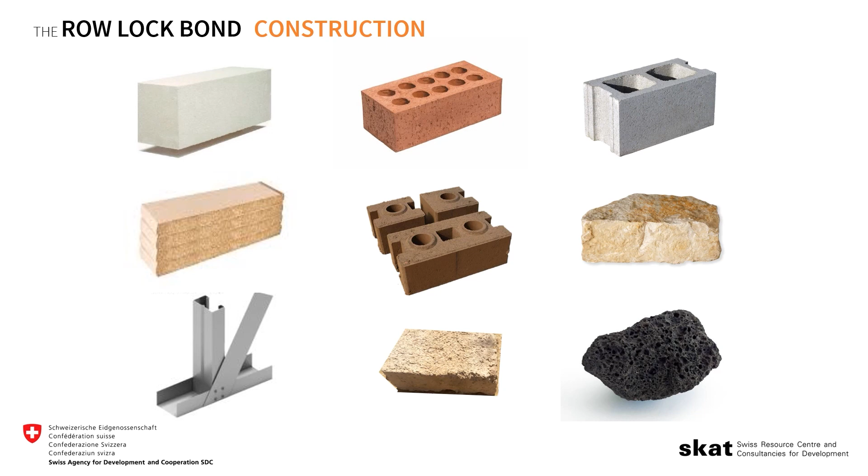All of you building and designing projects know you have to start controlling your quantities if you actually want to address and deliver the affordable housing being asked of all of us here. This really is the backbone of what Skat and the project are trying to do: figure out how to develop design solutions that can exist within this context and still deliver at the price point that we need.

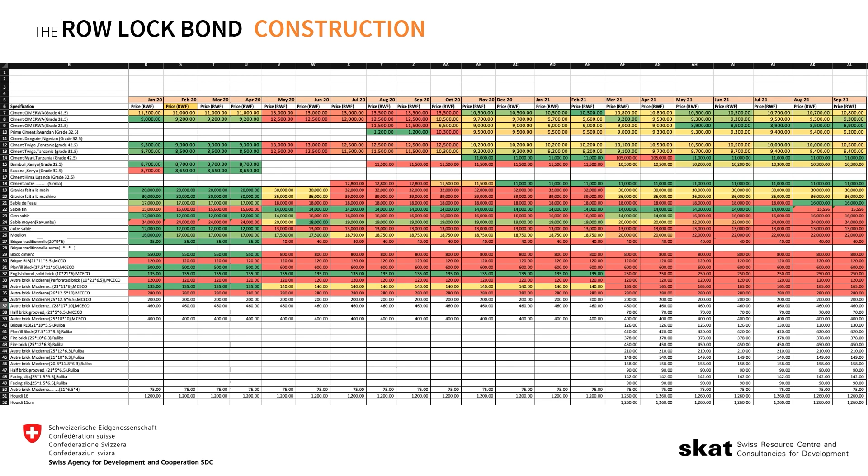Skat started to look at different walling materials. Today we're going to talk about the rowlock bond, the RCC reinforced rowlock bond wall. It's a function of looking at all the walls, all the building material inputs, and seeing that this one relies on less cement and plaster. We saw the price of cement go up quite a bit during this last period, and it continues to rise.

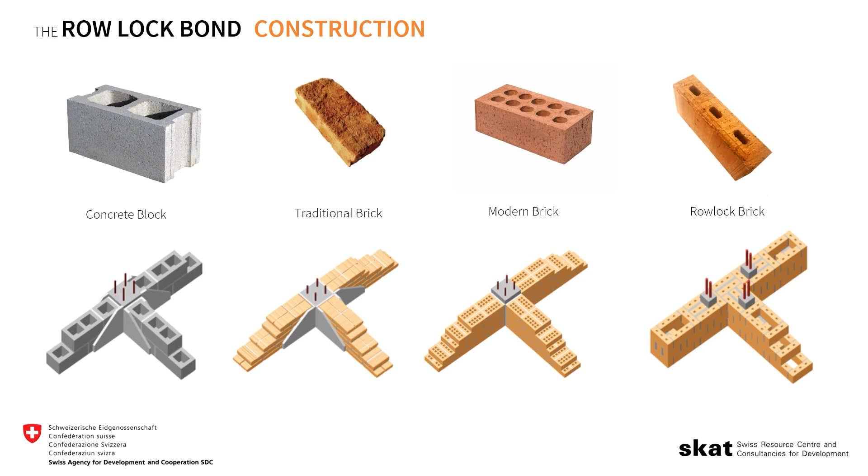Traditional bricks also require quite a bit of cement mortar and concrete for columns, etc. So looking at this type of study and trying to understand how to make the best use of technologies that might optimize our building material usage here, Skat came up with the idea of using this.

This is the rowlock bond, and if anybody knows it and sees it, you'll see there's a unique cross pattern. So as you're driving around town, the minute you see this cross, you know you've seen a rowlock bond. That also means you're seeing a cavity wall, and that cavity wall has a lot of potential thermally, but also structurally. That's what we're going to talk about today.

The rowlock bond is nothing that the Swiss or Skat invented. It has been around for a long time, specifically even before the Industrial Revolution. This house here is from 1801.

We can see our cross there, and we know that this is a cavity wall system. Again, 1856 in Canada, we're seeing this rowlock bond pattern. The reason why it was first invented was for workers' housing in the Industrial Revolution, being able to have a wall that is cheaper and minimizes the use of building materials.

And so it's particularly appropriate to us now, where we're having issues of high cost of materials, and yet we're expected to deliver affordable housing between 10 and 35 million.

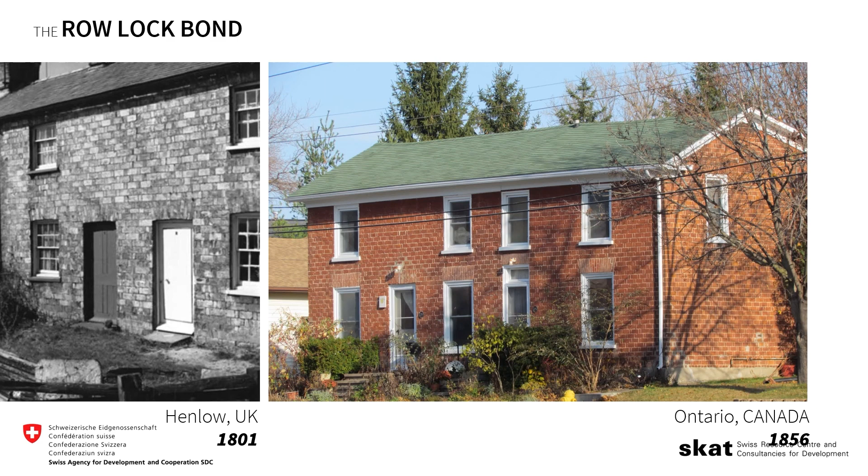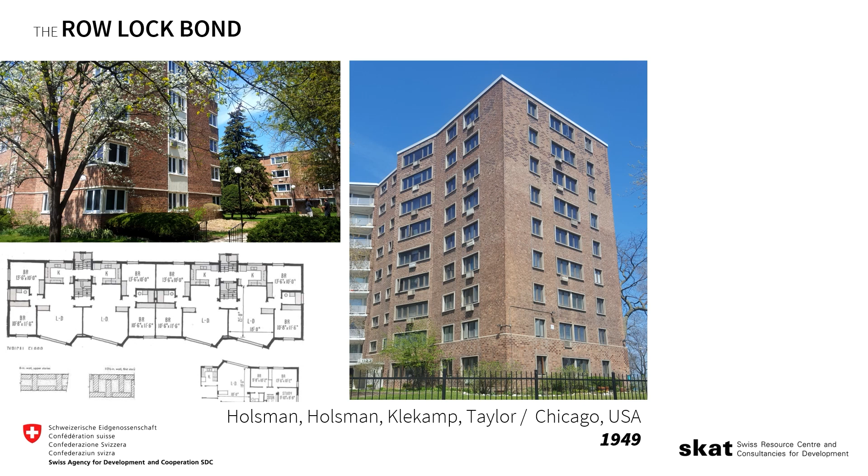So the rowlock bond, actually, even the Americans got in on the action in the 1940s. This is a rowlock bond that's 9 stories tall, which means it is a technology that can be adapted to different situations, where you can adapt the structural system to do different kinds of buildings. This was also a low-cost housing building.

Another one was built in Nepal, similar thing, and this one was actually built by Skat in Nepal, really trying to optimize the floor plan, optimize the interior circulation, to do something extremely basic that can deliver at the right cost and make good use of materials.

Now this is particularly interesting in Nepal because if anybody knows Nepal, they know that there are some earthquakes there, and this is also a high seismic region. So all of a sudden there's a parallel to think about why this is interesting for that context, and why it can be interesting for ours. Again, what can you do structurally to this wall that you can't do to others, that could help you respond to these issues of future shaking?

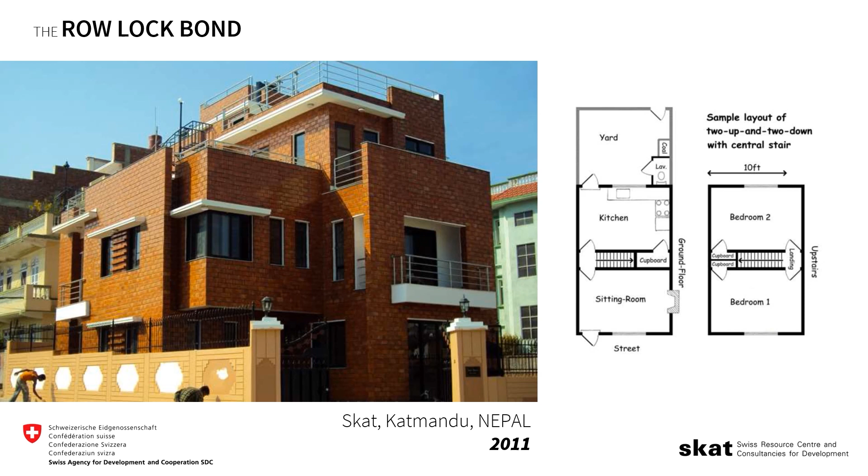You can do fancy stuff with rowlock bond, you can do curvy stuff with rowlock bond, and Skat did boxy stuff with rowlock bond. And the boxy stuff has a reason: that's how you can make sure that this is structurally sound.

The first time I ever discussed this building in public, someone stood up and said, 'You are being incredibly irresponsible, Fatu, showing us a building with no columns, how dare you?' And I realized I forgot the slide that showed all the internal structure. So today we're going to talk about all the internal structure, so that I don't get that comment again, and you know that Skat is doing good and responsible work by putting up buildings that are structurally sound.

Just to do a quick recap, here are our different walling systems. This is the one we're interested in, because it really minimizes our material inputs. This is significant, especially if our bag of cement has gone from 9,000 to 13,500 recently—thinking like this becomes quite important.

So even if you don't like the designs of Skat, that's fine. It's not about the design, it's about the structural system being proposed, and then all of you architects should be able to take the structural system and make it beautiful, and all of the other things that Skat as a project does not need to do.

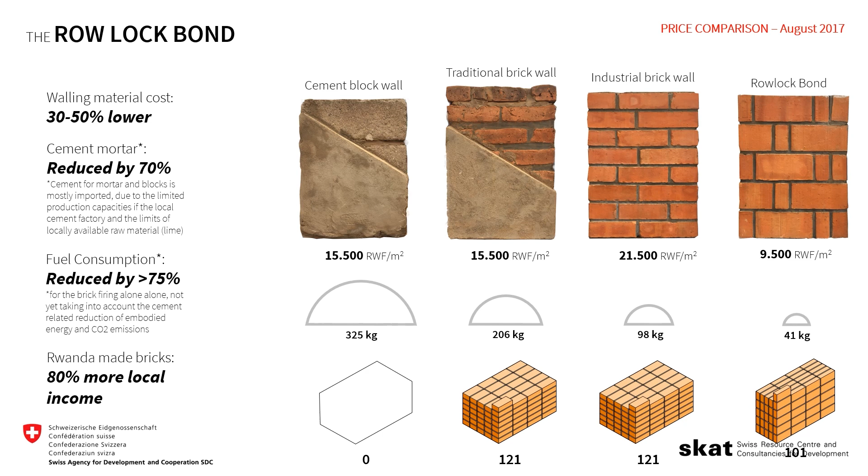Again, just reminding you, here are the prices of materials and the way that they're jumping. Here is cement also jumping during these sensitive times, so we need different solutions.

Within these rowlock bond buildings, secretly—and this is one that you'll visit if you go on the tour tomorrow—there's all this business inside. All of this is making sure that this building stands straight, that it resists seismic forces, and that it can also be a system that allows a maximum number of people to live in there comfortably and at a good price. What's actually inside? Let's take a peek.

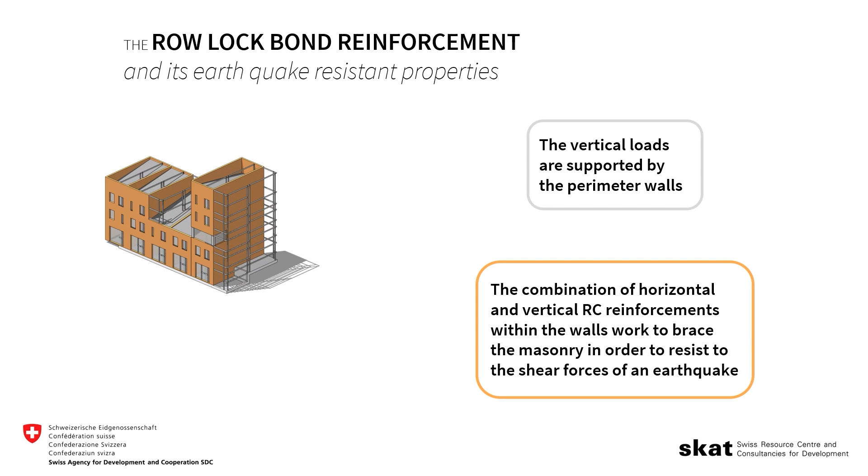So you've got your cavity wall here, and you essentially have 3 basic details. You can do rowlock bond. If you master these details, this system is for you and easily deployable. So we're going to have some vertical reinforcement, and that vertical reinforcement is exploiting the cavity and using the bricks as formwork to actually pour a mini column, shall we say—but it's not so much a mini column as a stiffener, we shall call it.

And when it's placed around a corner, it replaces your traditional column. A column would be like if I'm standing on one foot, but this, which is tied around the corner, is almost like a truss around the corner, and it's actually more resistant.

And that's how my seismic or my shear forces and my lateral forces, specifically at the base of the building, are getting the most push and pull. That's actually how that's resisting.

Then if I have a particularly long wall, I'll put a couple more of these vertical reinforcements. And if I have a T, I can then put these three and tie them together. Again, all the reinforcement details for this are available to you through Skat and the project, so please feel free to go ask if you want to see any of this.

So this vertical reinforcement is going from the building, tied into the ring beam, and goes straight up.

Then the second type of reinforcement is horizontal reinforcement, about every 1.20 meters, almost a corset, right? Which holds and cinches the building together.

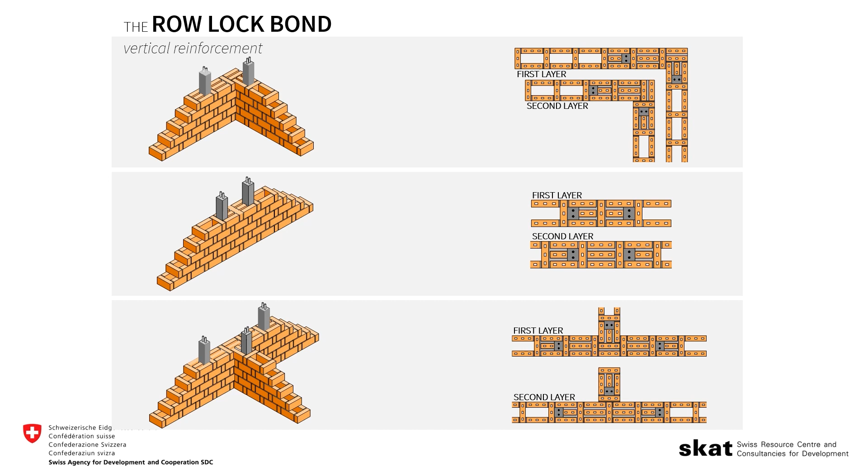Again, between the two systems, you're going to have your vertical, which I just showed you here, and then your horizontal reinforcement, which goes and ties the building together and also allows you to tie together these corner details. So all of a sudden you start to have this grid inside of the wall that is basically using the wall as formwork, but the wall is actually load bearing.

So we're moving away from a typical column beam structure, where all of your loads are point loads that are transferred to your beams and coming down to the ground to footings. No, in this situation, the wall is the load bearing wall, which is why the quality of the brick matters so much. That's why people like Samuel, who presented, a mechanical engineer specialized in brick making, is so important, because we need a brick here that has at least 10 megapascals to be able to resist those loads.

So the wall is load bearing, bringing the loads from top to bottom, and then inside, to resist all the shear forces, are these sly little reinforcements that fit into the wall. So again, you end up with this cage.

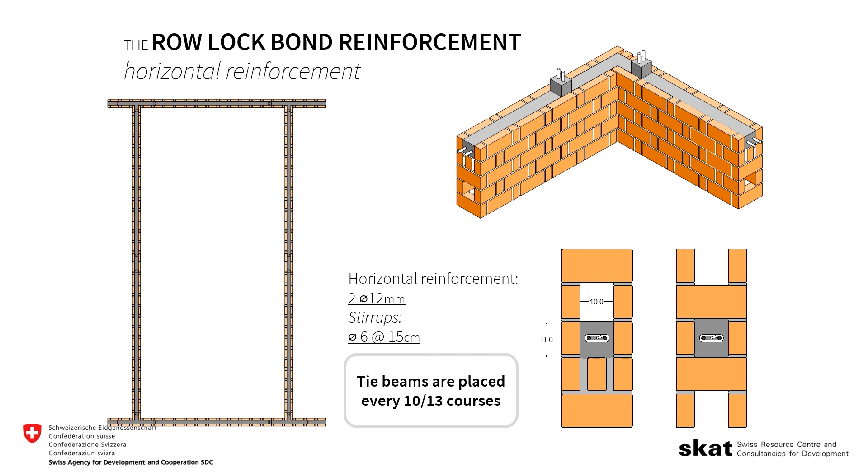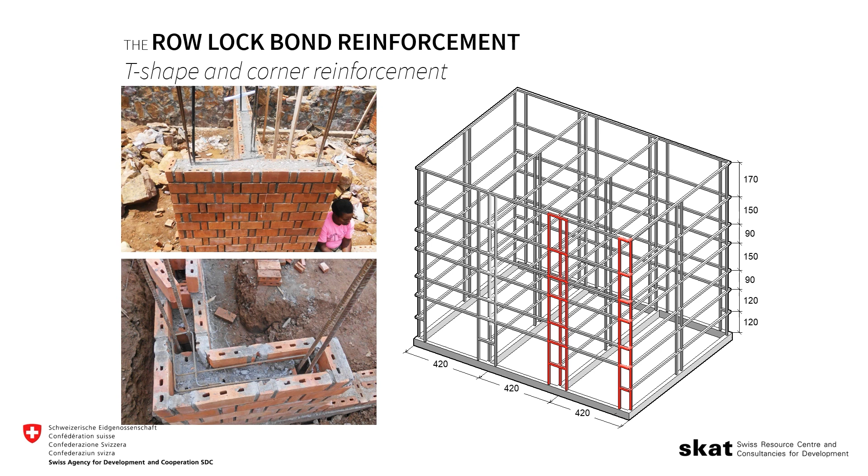So again, here is an example of our reinforcement and the ties that come with it. Everything here has been pre-calculated and pre-engineered for you, for a building that goes up to G+2. Anything beyond that, we'll talk, but for G+2, you're good.

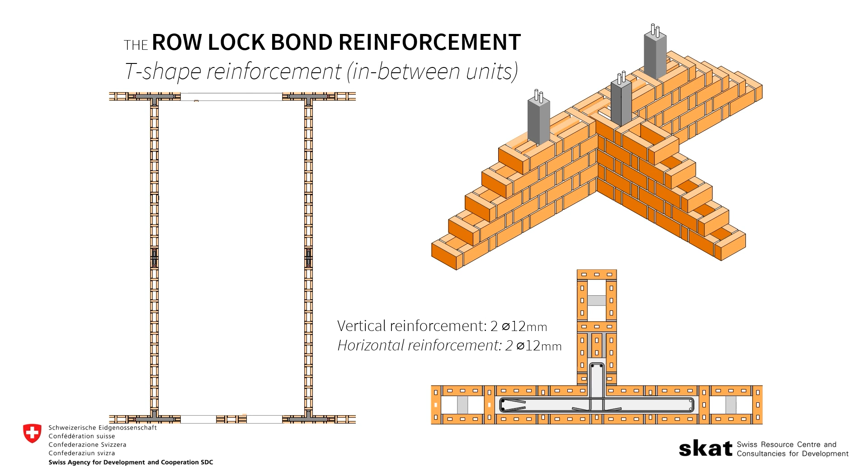Since the walls are load bearing, the dead and live loads are being carried down these walls, and anything you do in the front or in the back is fair game. So design-wise, I could have a bay window, I could have just a curtain if I wanted to leave everything open, I could have a big commercial storefront, I could have a small door—anything you want to do on this side, because it's not carrying the majority of the loads.

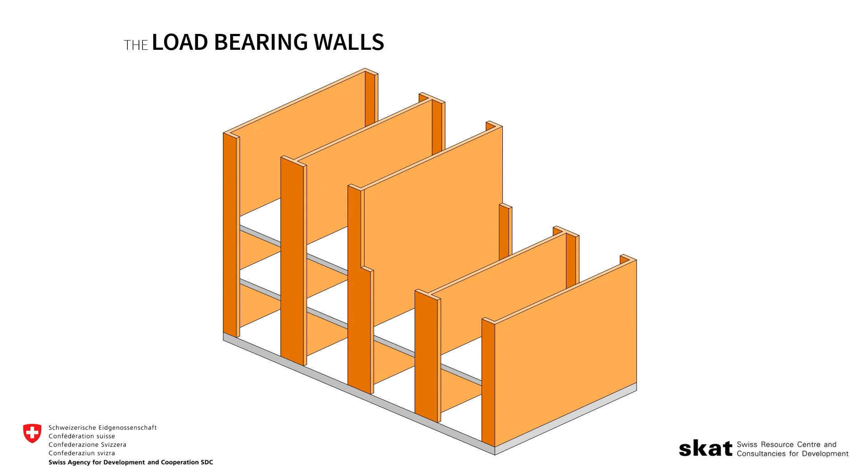So really, it's these side long walls. Instead of what we'd called this house the Swiss cube, it's really a Swiss tunnel—these are the walls that you can make as long as you want and then do anything within this opening. Rowlock bond is very well adapted to this. If you want to do something fancier, that's fine, then you'd start to do a calculation to see whether or not it's the right technology for you. But for something simple and durable, and possibly to assist in the densification being asked of us as architects working here in Kigali, this also might be of interest to you.

What this means then is, because these are my load-bearing walls, I'm going to have my slabs carried on those walls. So I would put my slab system this way.

Then when I start to design, it makes most sense, if I'm going to have stairs in a storied building, to remove a portion—remove one of the beams here, one of the floor joists—and have the stair go that way. Again, the objective is to do something that minimizes material consumption. It may not be beautiful, but it has to be smart.

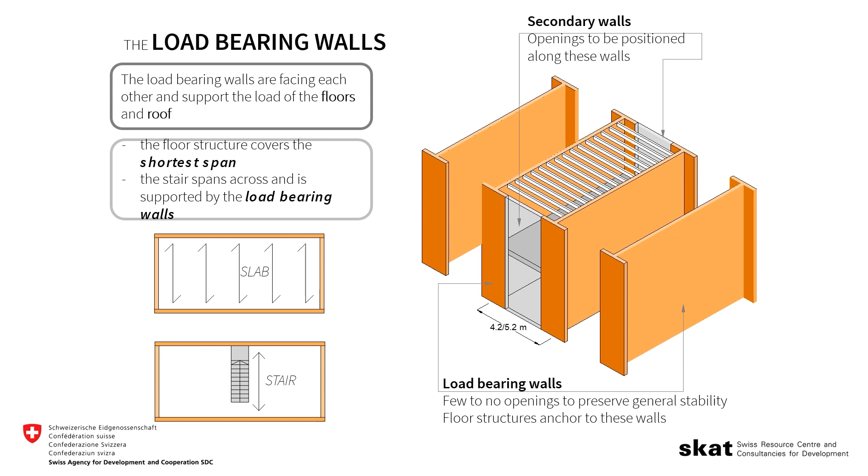What this means, which you'll understand, is if you have this load-bearing wall, the first thing you want to do is not cut a big hole in that wall. Otherwise, you'll have to reinforce the lintel, and then you lose all the advantages of having this front be completely open.

So when you visit the Skat houses tomorrow, or the Proeco houses, just know that this is the logic of trying to optimize the materials and construction techniques available to come up with the best cost house possible.

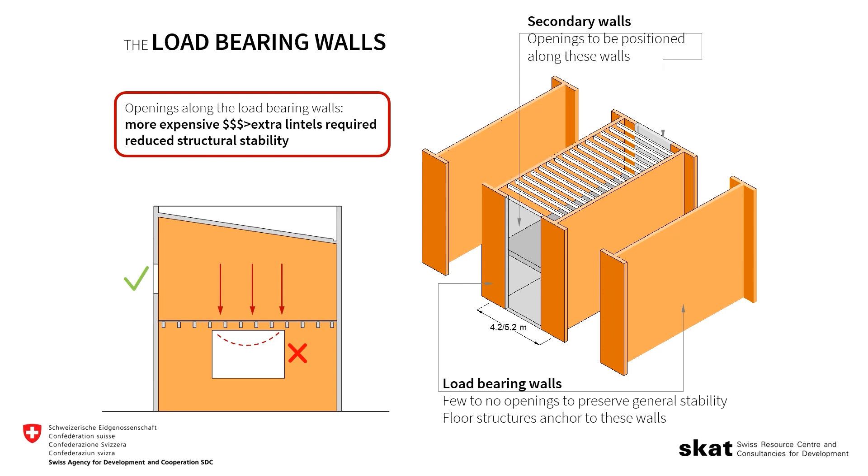Which is why, if those of you who have visited PSF have seen the 8 million house, it says 8 million on it because it cost 8,185,000 francs in 2017, August 28th, when we inaugurated it.

So what that means is, if these walls can be as long as I want them to be, and they're going to carry the load of my slab, the only constraint I have so far is my slab system.

When you start to think about MaxSpan, those of you who have used Ruliba's beautiful MaxSpan product know that there's a MaxSpan of 12 and a MaxSpan of 16, and the depth of those MaxSpans depends on the span.

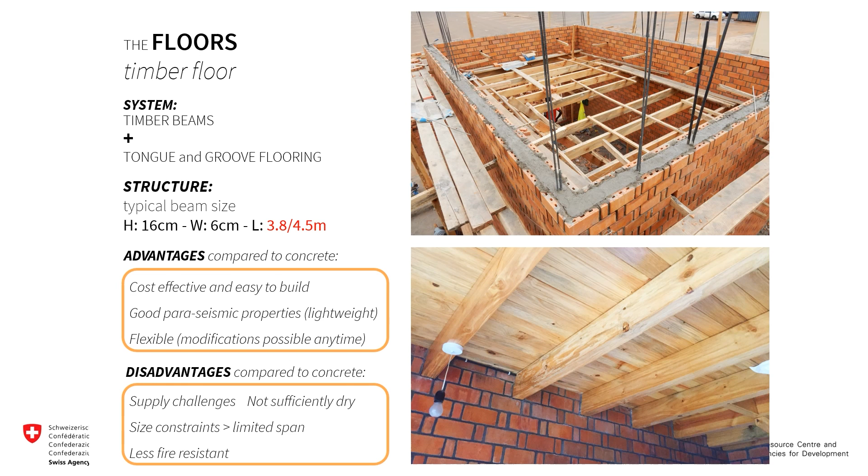In any case, here's the timber floor solution, and what's really nice is that it fits right into the rowlock bond pattern. This repetitive cross pattern, that bond — this short one is the rowlock, this is the shiner. You essentially cut the shiner and put your wood joist right in there.

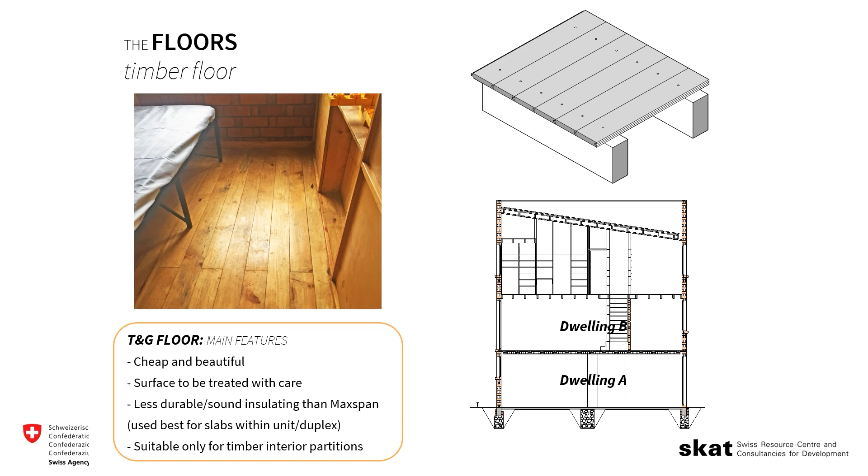It's quite beautiful — you put your T&Gs on there, you can varnish or paint. The difference between eucalyptus and pine: one is usually not well dried, which means you might have warping, and the other is sometimes soft, so you don't want to wear stilettos into the bedroom after a rockin' Saturday night. The system slots right into the rowlock bond, 57 centimeters on center, and goes right along the building.

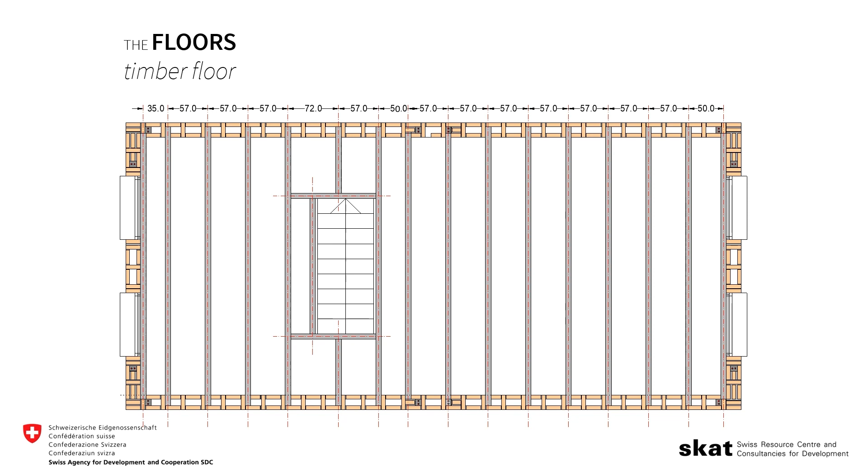So that's the third thing you have to remember. I told you there were 3 key architectural details you have to remember about the reinforcement. The second one is where your slab system or beams connect into your load-bearing wall. Once you recall that, you can essentially plug and play all throughout a building or a series of buildings.

But construction-wise, this is very interesting because I basically don't have to stop — I don't have to waste time waiting for my slab to cure. I put the joists in and the mason can continue building the wall, which means in terms of speed, this is also quite an interesting system.

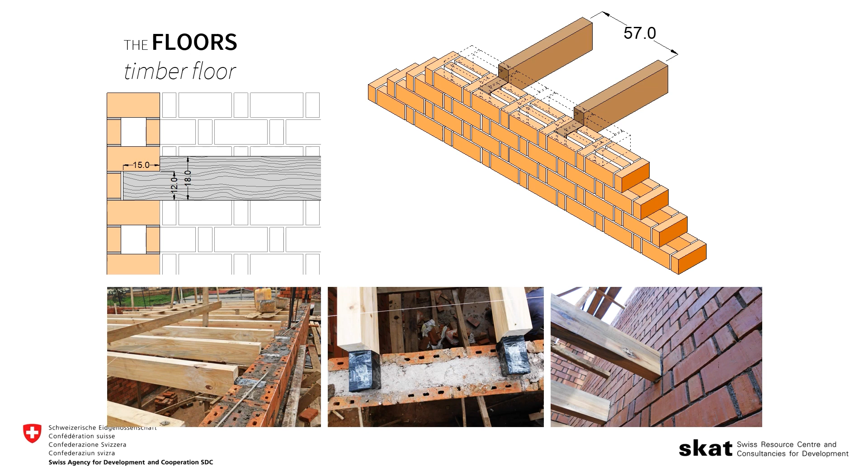So MaxSpan — we did MaxSpan, or Skat did MaxSpan, in 2 ways. One with a precast beam system: by using formwork and casting directly on site, after 7 days you can take it out of the formwork, put the beam in place, put down your MaxSpan, continue building, and then do your floor.

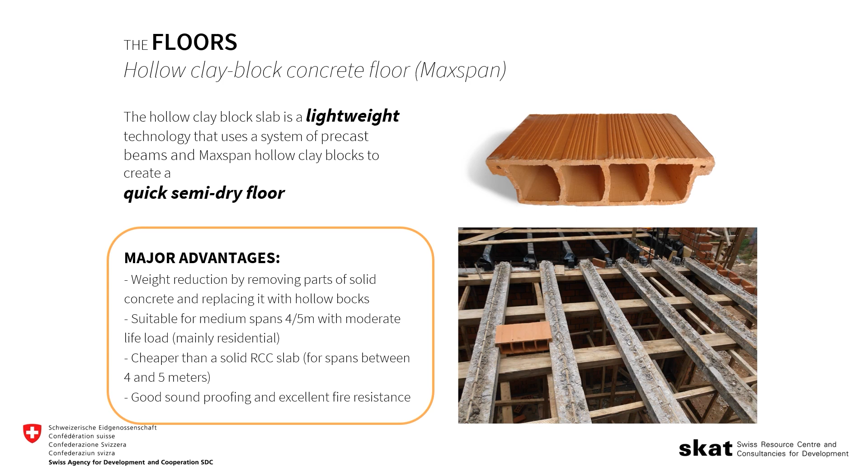That's not the way it is when you do it in situ — you'll have to wait 3, if not 4 weeks, to have a floor that's completely cured. Again, these MaxSpans you're all familiar with, so I won't waste time there.

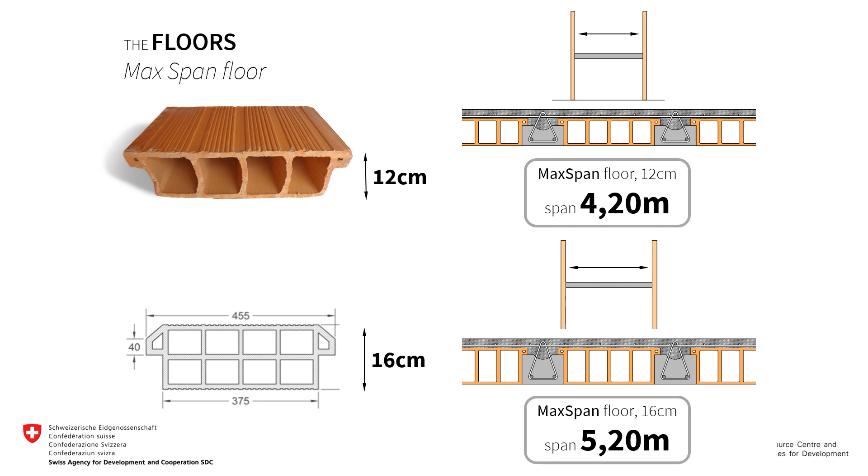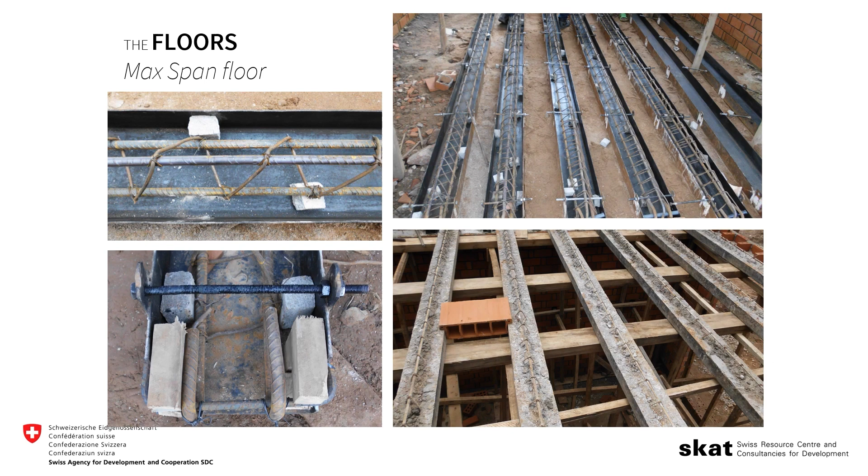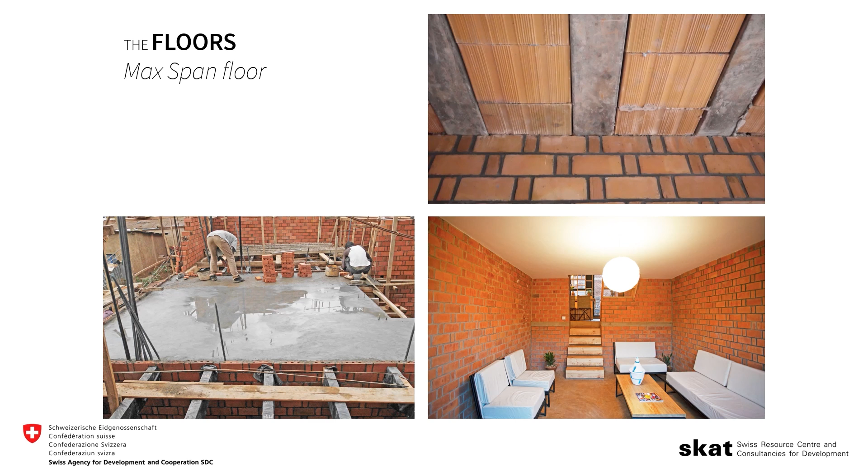Once you use a precast beam, you can plaster and make it beautiful, and no one would know the difference. The main gain is in terms of time and the timber you don't use for scaffolding. The Max Span precast beam can fit directly into the rolock bond system, which is incredibly useful. At 57 on center, you can start to pop your Max Spans directly in there, so speed really is of the essence.

There aren't very many details to master, which means on site you should be able to inspect this and roll it out at a good pace if you're well organized and your materials are available.

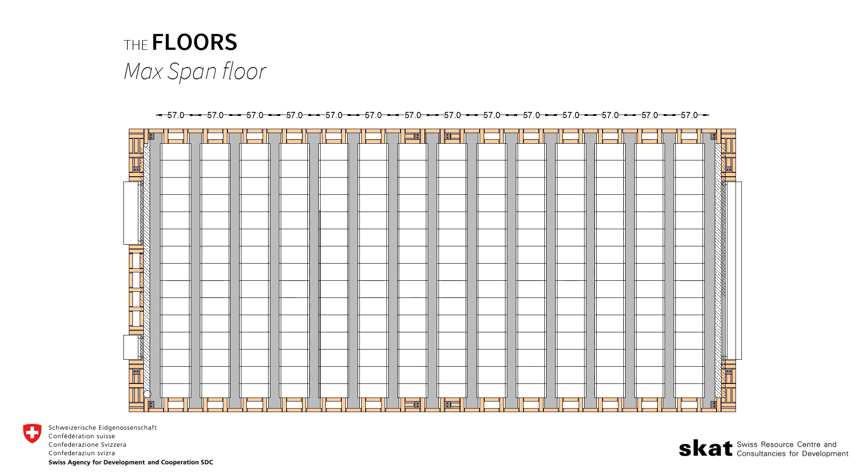In one of those horizontal ring beams, that internal reinforcement that goes all the way around, you can actually put waiting bars. These two rebars come up and the beam can hook directly onto those bars. Then when you pour the screed, the 4 centimeters over your Max Span, you seal that whole system together, sealing the wall and the floor, and getting a really good tight bond.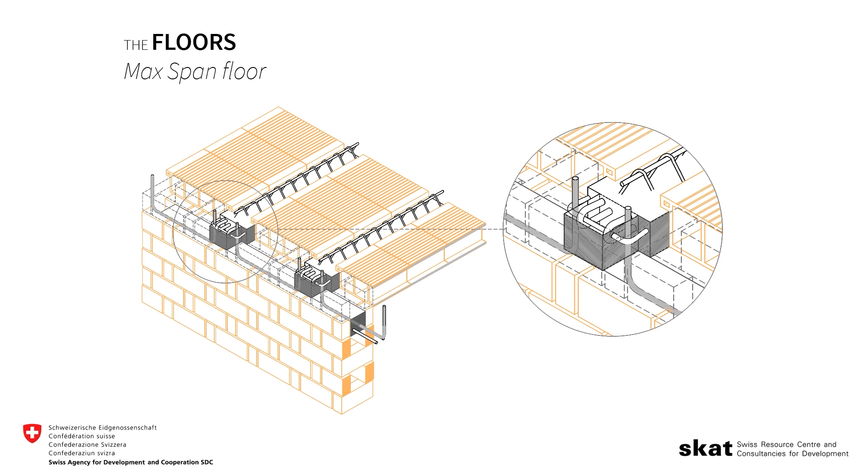The fantastic thing about this is you're able to put different systems on the same wall. So if I want Maxspan on one side, I can have Maxspan notching into the other side of the cavity, or timber on one side and Maxspan on the other. You really can begin to vary. Here's a photo of the precast concrete beam on one side, and the wood wrapped in plastic coming on the other side, same detail you see here. Then you pour all that together, really tying your building.

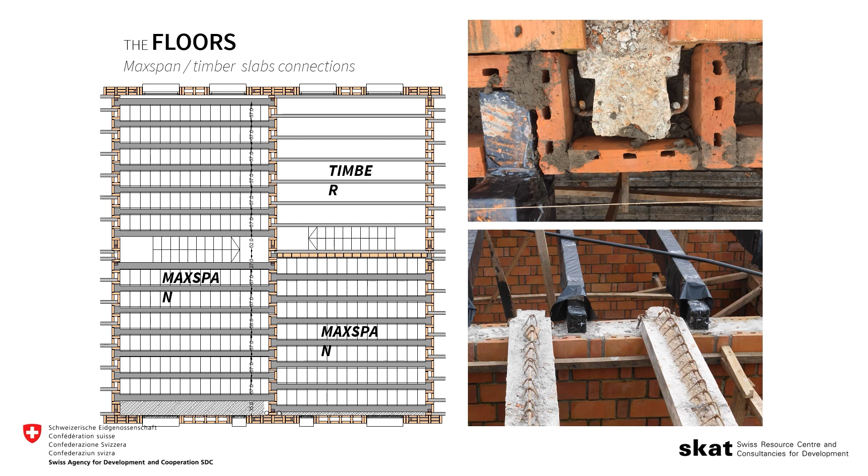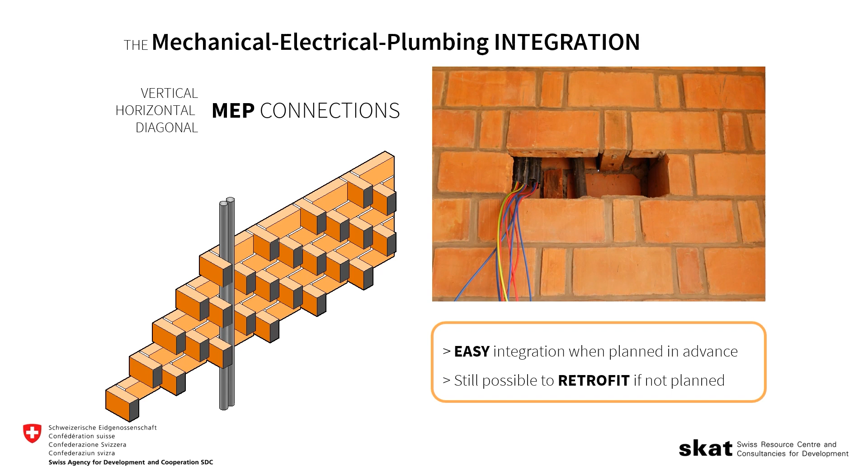All of this is possible because of this cavity wall and this flexible, user-friendly module. The other thing the cavity can be used for is running your cable channels, which is fantastic. In rooms you don't plan on plastering, you no longer have channel covers or cable covers outside of the wall. When you start from the base, you should put in those cable channels and continue up all the way.

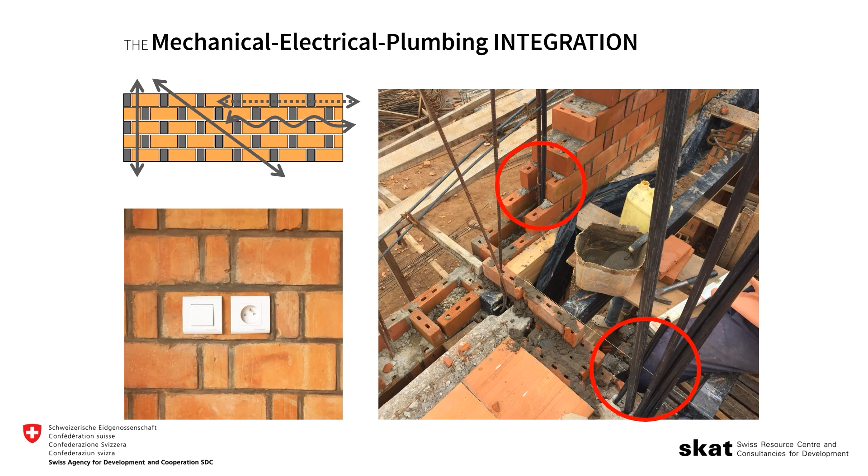What this does, since it's really a series of basic connections, the slab to wall connection, and the few connections around the different corners of the building that allow you to deploy the rolock bond, means that in this direction you can stretch as long as you want. The width you can stretch up to the tolerance of your different slab systems.

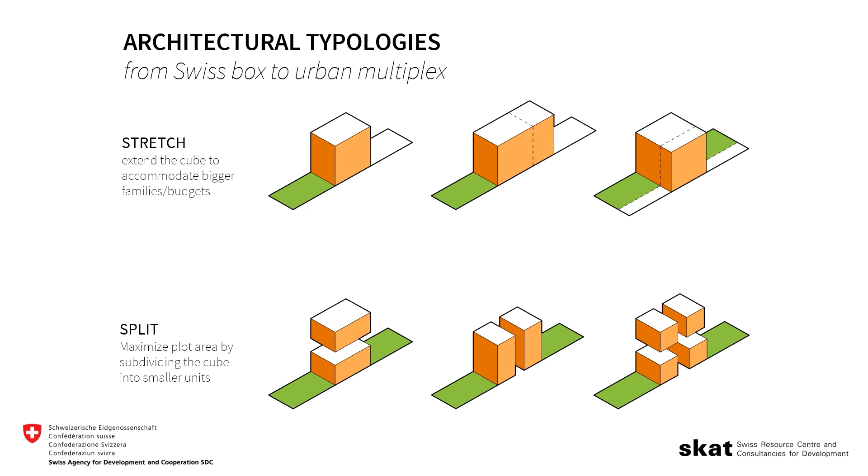You can also split the building, with one floor on the bottom and one floor on top. The reason we explored going up is because cement and roofing materials are our most expensive materials on the market, so it becomes a lot cheaper to get skinny and go up rather than have a landed building. A storied building is actually, in this context, one of the more efficient ways to build.

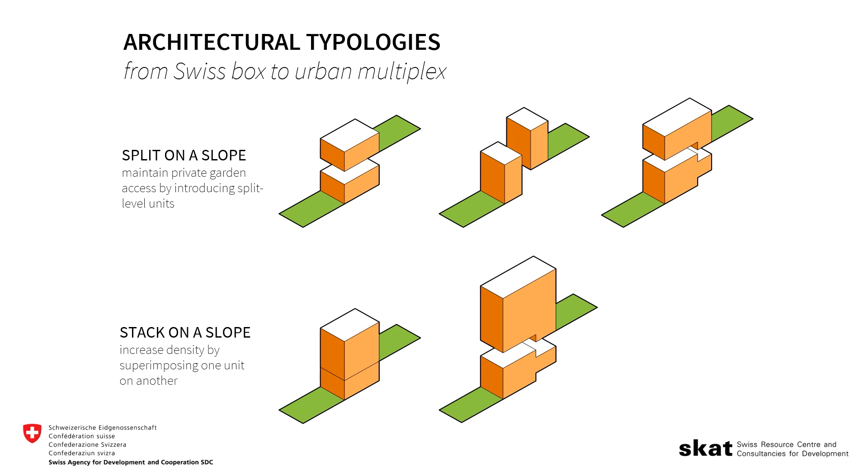You can start to use this system of stacking volumes on top of one another, using the same system and different types of floors to divide them. You can use the slope to your advantage, meaning one entrance on the bottom and another on the top. Then my slope looks like this, so I don't do massive cut and fill as we've seen in many other places. I can step down the hill lightly, which is cheaper and safer, and then notch my buildings around it.

So the point is, essentially, I can multiply my little Swiss cube box at the end.

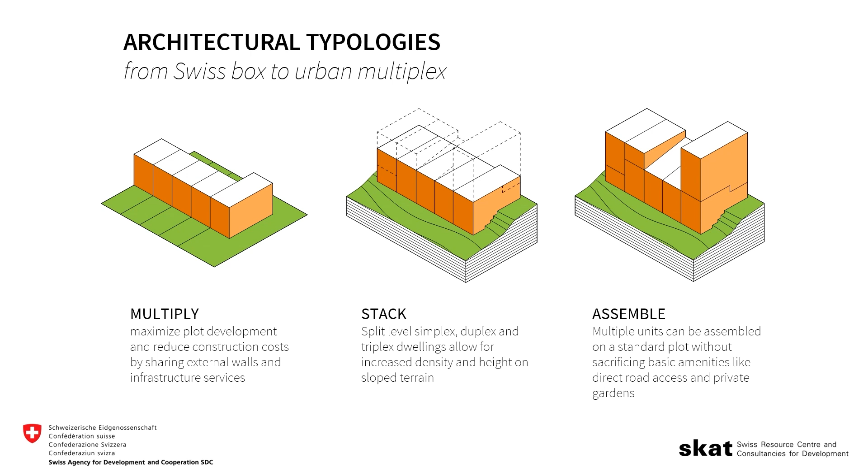I can stack them on top of one another, and then I can assemble them into a creative building. So we started with these cubes, and everybody said, well, I don't want to live in a cube. Many people who came to the expo said, can I have a second window here? This was all for demonstration, to show that you can do it very, very easily and control your costs.

So if I skip quickly to the planning module, the P of our CPD, the question is, what thinking do I have to do to take it to a larger scale and to start to actually look at the city?

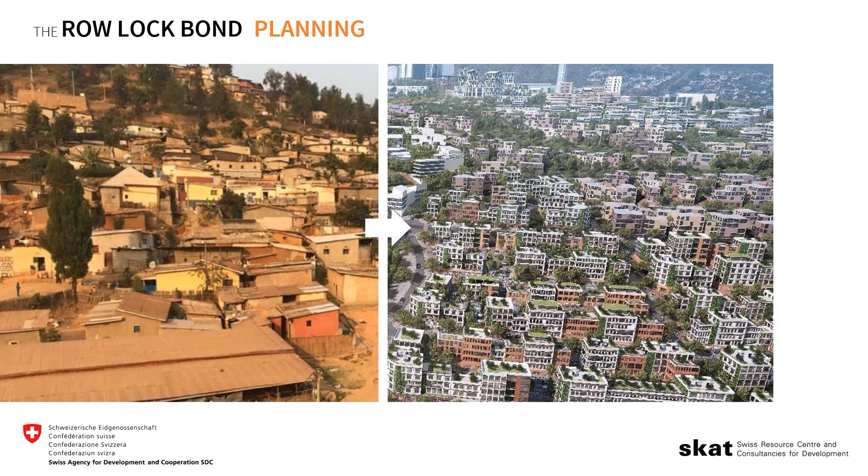When I did a quick survey to see in R2 and R3 zones, which are the zones designated for upgrading, and looked at all the plots in Kigali, there are 40,000 plots that don't meet, not even in terms of size, the typologies that are being proposed, okay?

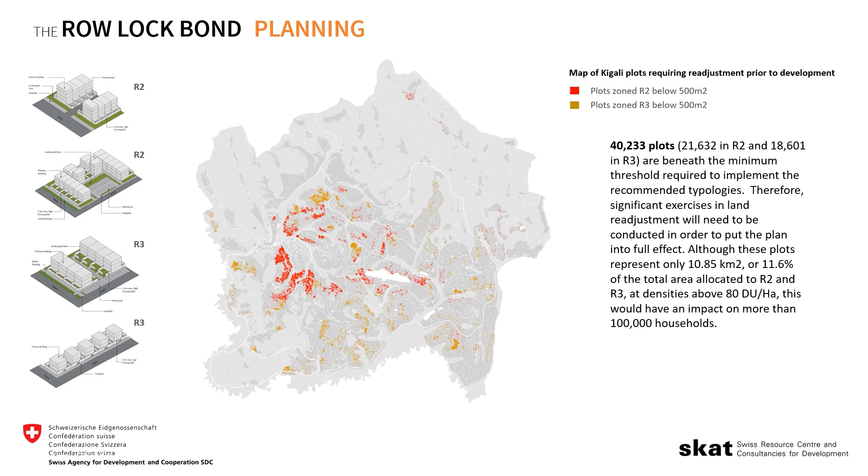And this is our problem, you guys, as architects. We have to come up with a solution to make sure these people have appropriate housing solutions to be able to grow this city and meet the master plan. We all need to stay employed and have people buy houses, so we've got to be able to deliver them at the right price point.

So what it means is that somehow we need to get from this current situation to this, which is what the master plan is looking at.

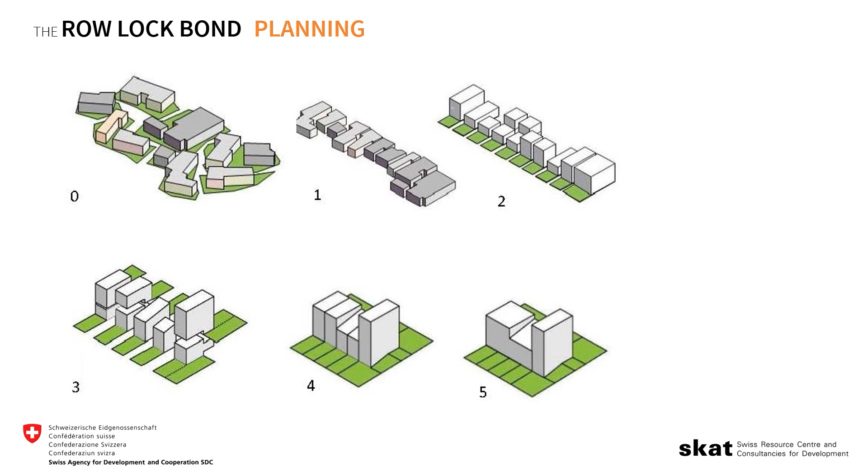And our row lock bond cube system, which seemed pretty banal, can actually maybe help us get from 0 to 5, right? Because I know I can stack it. I know I can multiply it. I know I have very few details that I need to master. How can I mix that to be able to get what they're asking me for in the master plan?

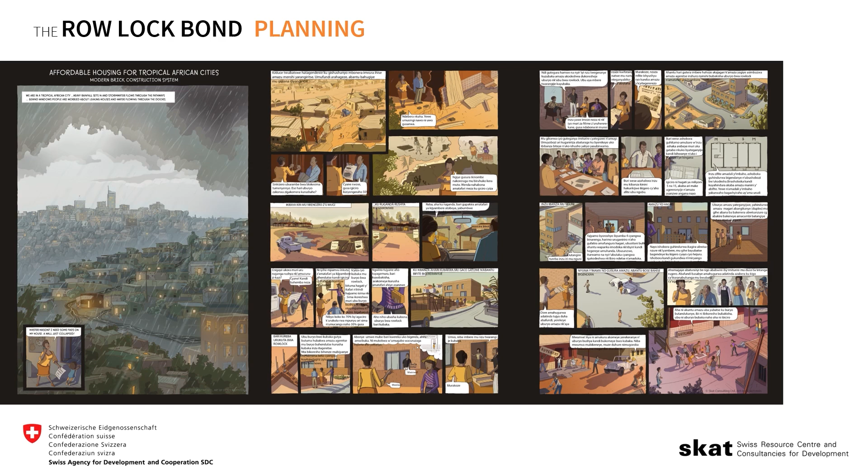So as any good architect, we start with dreaming, right? And so we drew this comic strip, which I love, this picture of Kigali. It's stormy, someone's house falls down, etc. She gets together with someone from city planning who says, why don't you merge your plots and make a new building?

So we drew this, and said, okay, we're going to upgrade an informal neighborhood. This is what this could possibly look like.

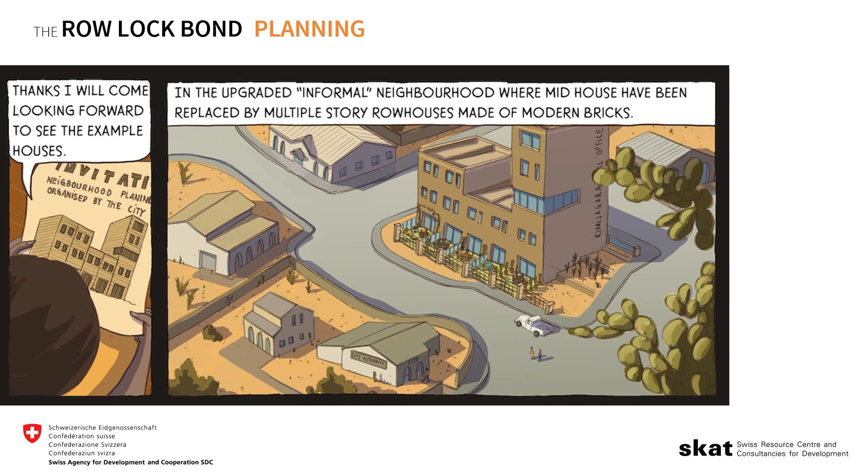And so, like any good architect, you have a dream, so why not build it? So we built it. The idea was to use that same system, of that cube, those reinforcements in the corner, except this tower is a little different. That's for another CPD day.

But how can we begin to stack and get all the cost efficiencies using the system that we know, which is a cavity wall with some reinforcement in it?

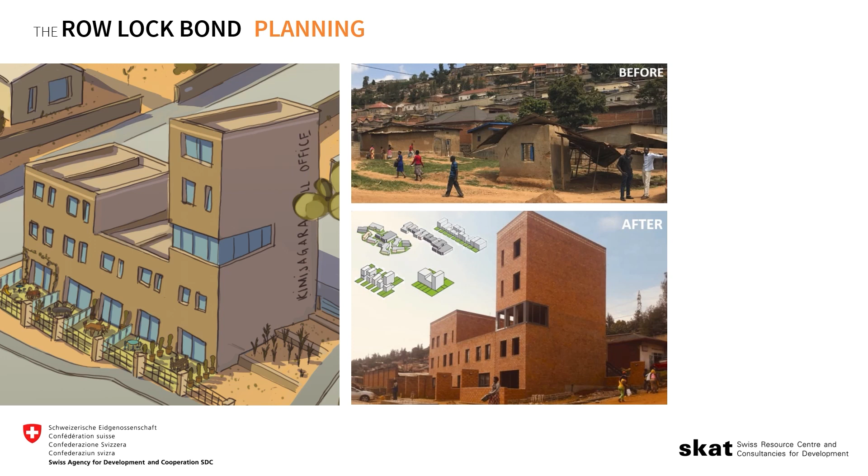And so after we built that, we were satisfied for about 2 minutes. There was a beautiful panoramic window, which I hope you can see. We sat there, and then that allowed us to look across and say, oh man, we have all this to do. Okay, so that's where the second part of the project is, to figure out how to scale up.

We did, the first test was done using the technology, but again, as architects, how do we take that technology and turn it into something like this, which Samuel showed you and which you'll visit tomorrow.

So we go back to our cartoon, which is where we get all our inspiration, and realize that it's about meeting with the people, doing it through a participatory process, and figuring out how everybody can get at least what they had before, but better, okay?

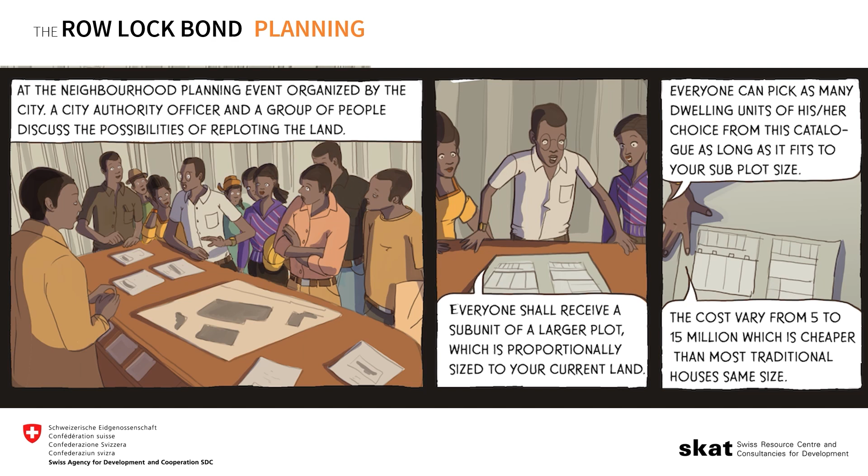And so the team from Skat sat with people and discussed, this is your option, you can have this cube, this cube, this cube, this cube, and the people are able to agree.

This is the situation we have now. If we start to densify that situation, oh my gosh, we have a whole bunch of free land. Can that land be sold to be able to finance what's happening in the middle? So I could possibly have some commercial here, and then it becomes a planning exercise.

We as architects really are responsible for thinking about how our construction systems actually have a reality, a vision, a language, and a logic at the scale of the city.

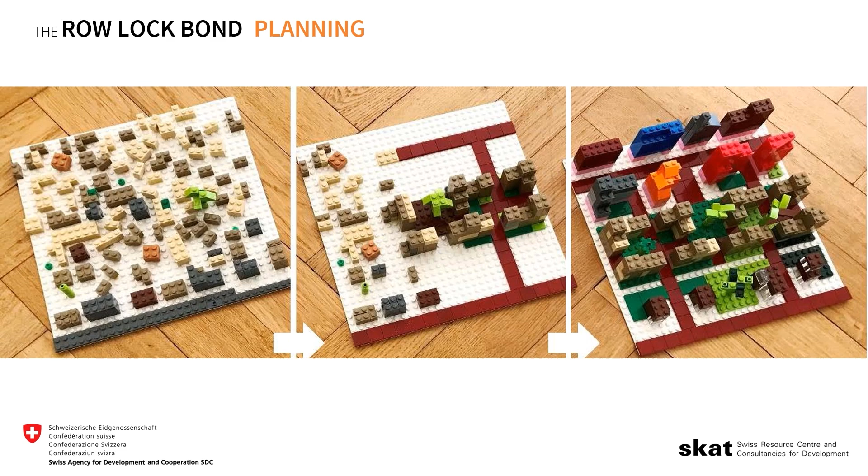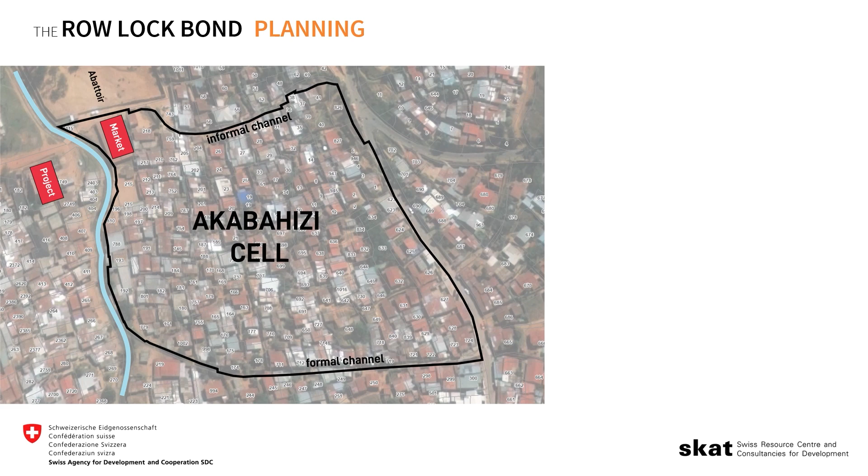So we take our plot - I'm hurrying up. This is where we might need some fire access when you're doing a new neighborhood. This is the old building here project. And then this was the whole big zone.

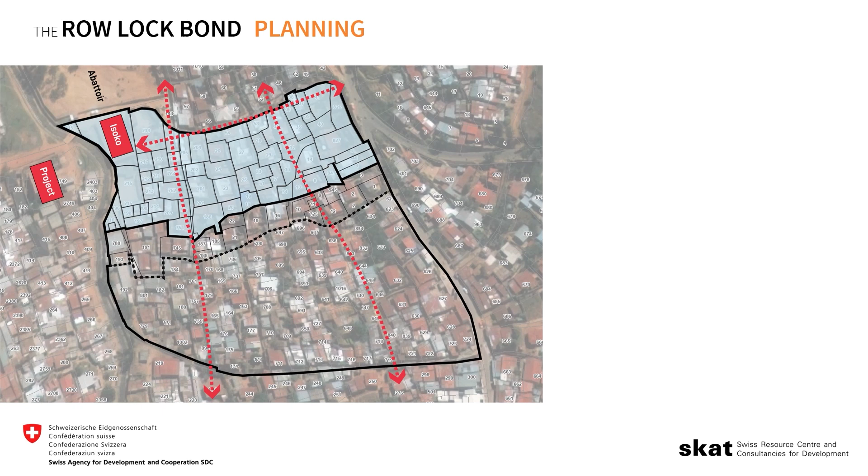So what happens is if you start to take this zone and think about how to apply our cube system to it, we can maybe have some commercial down here, some residential down here where all the people are currently living. So again, stacking and using this seismically high performance technology to be able to redo this neighborhood.

And so this is what Skat is now doing, with the funding from the Swiss and the city of Kigali, mostly the city of Kigali for this part, figuring out how to redevelop and build this using the system. So you'll see all that tomorrow.

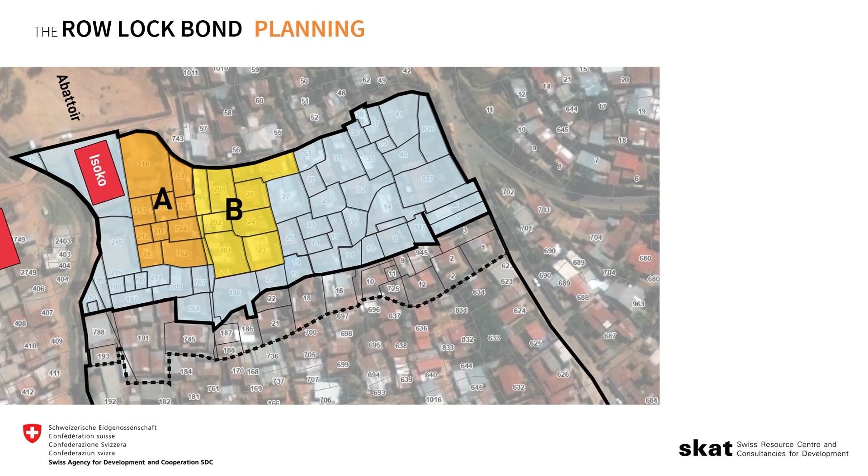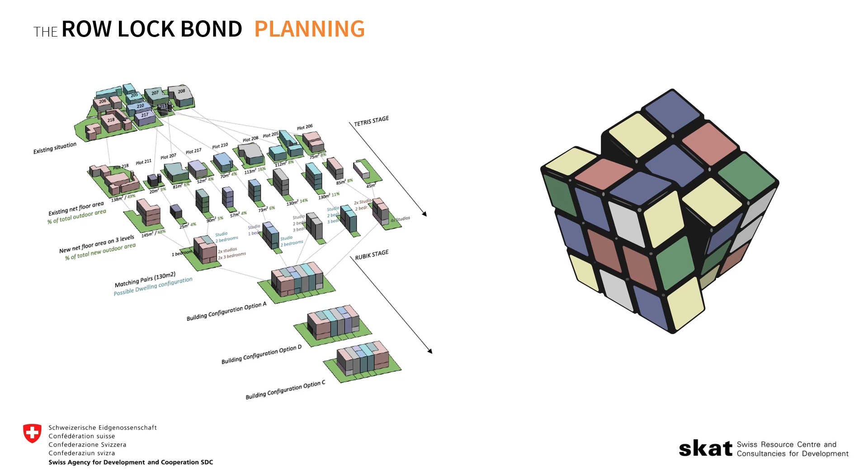And then how do we start to, again using the rules of the technology - I know my slab can be this wide, I know my wall can go this tall - all those structural properties, how can we begin to take everybody's choices and put them together into one building? And it's possible.

Again, that's where we go back to our technology. Remember, we have our slab system that allows us to do max span on one side, which acoustically makes an acoustic divider, so I can have that when I have different buildings next to one another. And on the other side, I could have my timber, which is cheaper, but maybe within the same house acoustics aren't such a problem, so I can use this technology.

So the whole time Skat was trying to negotiate this, they're also negotiating the technology and what the technology can do. And if there's anything you take away from today besides floor details and a load-bearing wall, it's that it's how you apply these construction and architectural systems that will really help you figure out what you need to do at a larger scale.

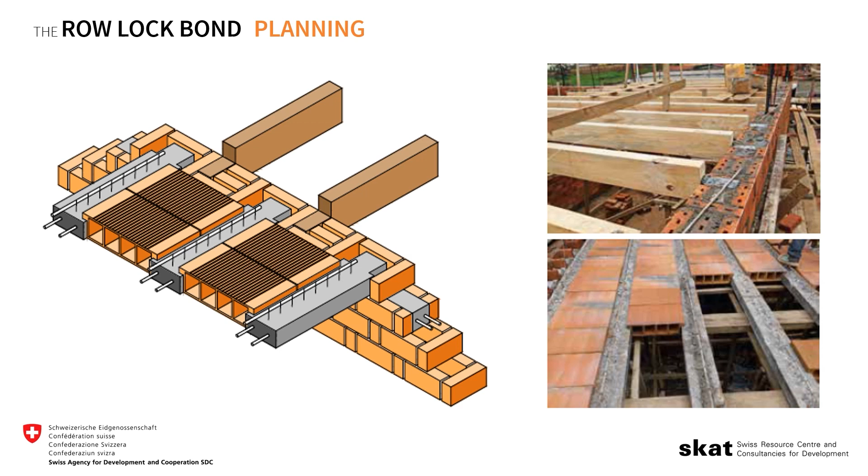And so now they have this. Congrats, Skat, Proeco, inaugurated today. You'll go visit it tomorrow. Good job, guys. So five years from a catalog of ideas to this building and the other building - I think that's not bad.

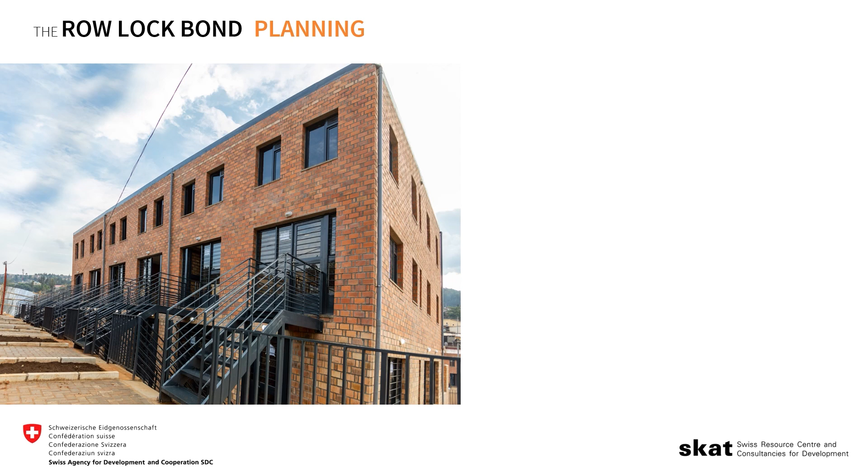The second thing is that Proeco is also working, and Skat is also working, in Bukavu. So again, a similar context of needing to be upgraded, small shops, people need to preserve this - this is how they make money. The real house is in the back.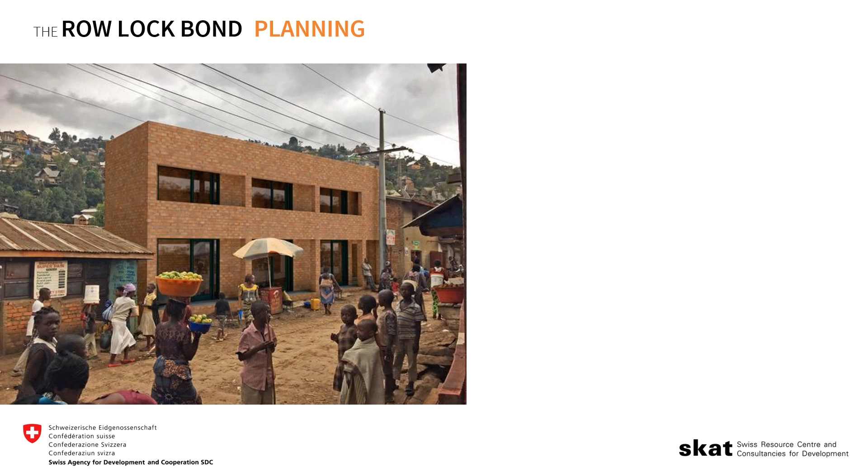In Bukavu, where land is incredibly expensive, they made a smaller floor plate and then went taller. So this is three stories. And instead of having a garden outside like they do here in Rwanda, this was possibly - I think one of our proudest moments - the rooftop terrace that allowed you to see all of Bukavu.

So all of a sudden you can start to think, even in this really basic system, how to take green spaces and all those other things that architects love and want to make sure we have a place for, in a crowded, busy city with high land prices, and actually think about how to put that on top of your home.

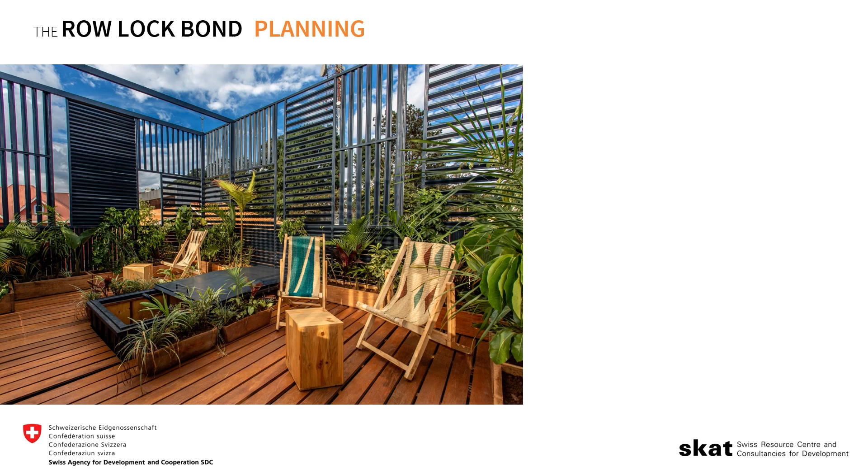So, I will end on a demonstration. This shows what the project was able to do using this technology, these three things, and then the big ones you'll hopefully visit tomorrow.

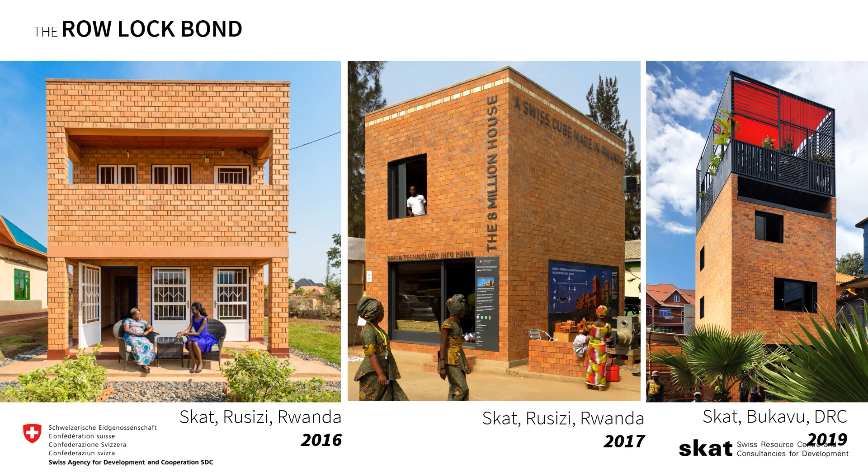But since the technology was first introduced, and since that house at PSF was put there on August 28th, 2017, all of these projects have multiplied across the region, and this is even a year old. There are over 2,000 copycat units using this technology throughout the city, and it's quite fun to drive around and take a picture. Once you see that cross in the bond, you know that's the row lock bond.

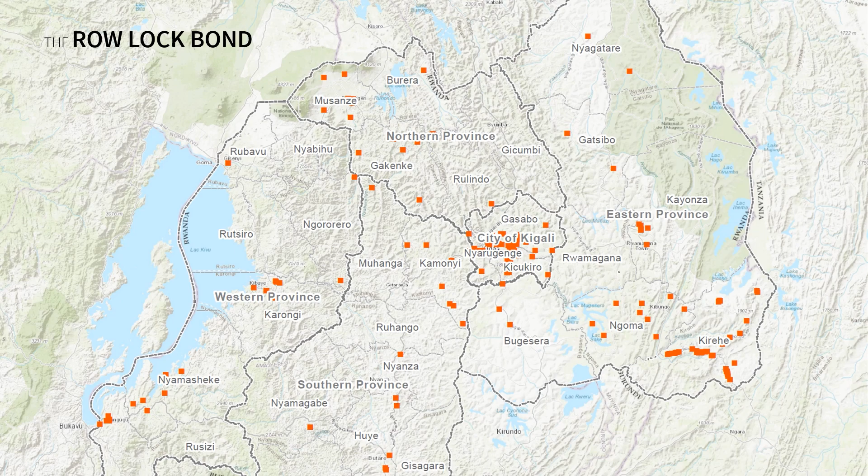Ruliba now makes it, everybody's using it. Some of the IDP model villages are using it because it's an efficient way to minimize consumption of expensive materials. This is an example done with white bricks, which are absolutely beautiful. This is in Kacyiru.

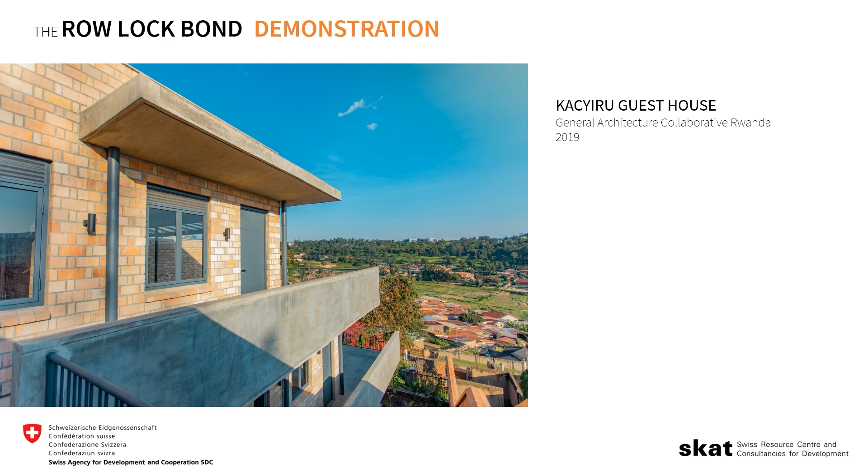This one has a slightly different structural system, which is a little bit more complicated, but we can go through another time. This is what the house looks like, again stacking up the hill. Interiors, beautiful. This is the interior in Bukavu.

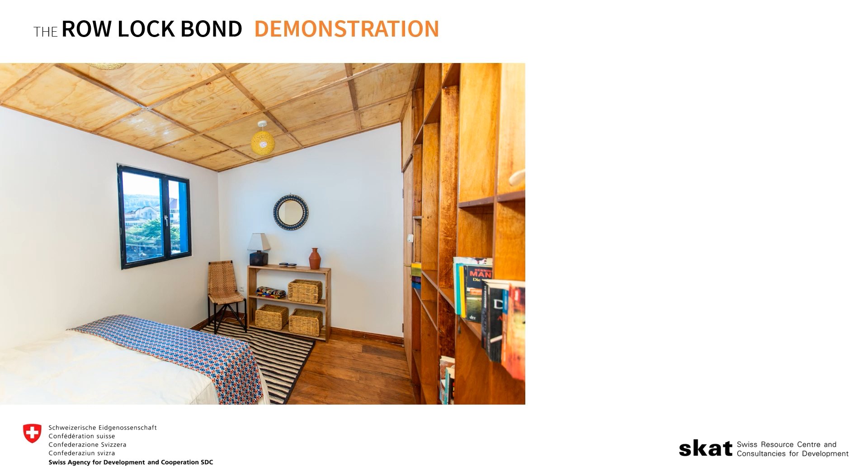This is in Kanombe, still the same basic row lock bond system that Skat was using, but you can actually start to decorate it. That front facade I told you was flexible—this is what happens when, as an architect, you take a position about what that opening should be like. Again, the same system of load-bearing walls on the side, et cetera, but has a totally different look.

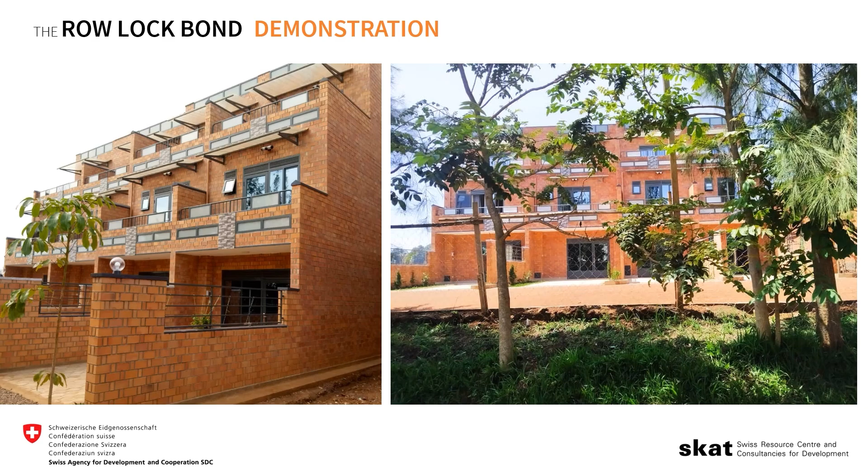Another version, which is actually quite interesting, and I will end on this one, because this was actually a copycat of one of the buildings that we did. And that really allowed us to do a comparison with cost.

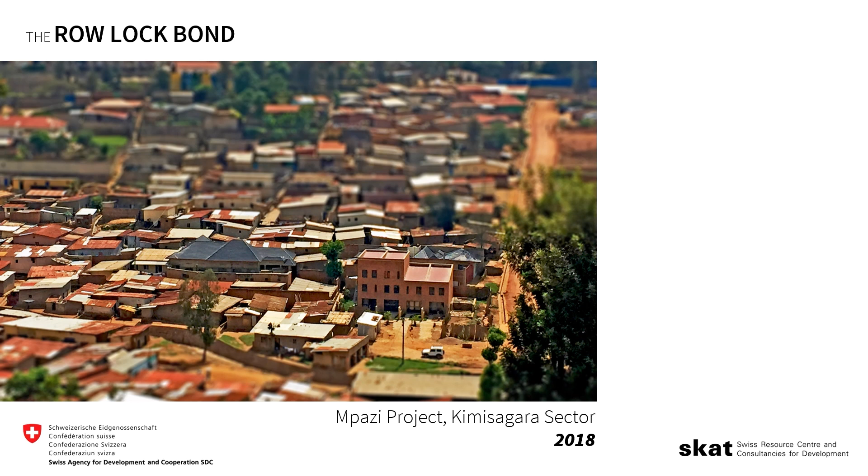The tests Skat was doing were about whether you should pour in situ, do precast max pan, plaster or not. Since they did 8 units here, and we did 8 units at the other project, it really allowed us to see what the difference is in cost. Luckily, the owner of this building has shared all the costs with us so we can do that proof of concept, comparing this building, our first 8, with theirs.

So when you make a choice of putting no plaster and no tiles in the kitchen or bathroom, what is actually the difference? We had no tile in this building. The tile used for those 8 units was 14.4 million, which was 21.4% of all the building material costs.

So again, the decisions we make are important. This is totally appropriate for some markets and some contexts, but understand there was a reason why this was thought that way, and what the difference actually makes. As a designer, you make decisions—when do you introduce this, when do you not? I think you can do both things in one building.

Again, the cost in the Skat building you'll see tomorrow—mostly it's triplex dividers, which people were very upset about for privacy. These walls in here are plastered. The difference in material for plaster: the budget for those 8 units was 16 million on plaster alone for interior. So I've got my tile at 14.4 million.

I've got 16 million now for my plaster—that's 30 million divided over 8 units. You do the math, we're talking about 4 or 5 million. The city, the government, and the ministerial instructions are telling us to stay between 10 and 35 million. So a dumb wall with 3 details and no plaster is starting to maybe have its place somewhere in the housing market. Not saying at all it should be the only thing there.

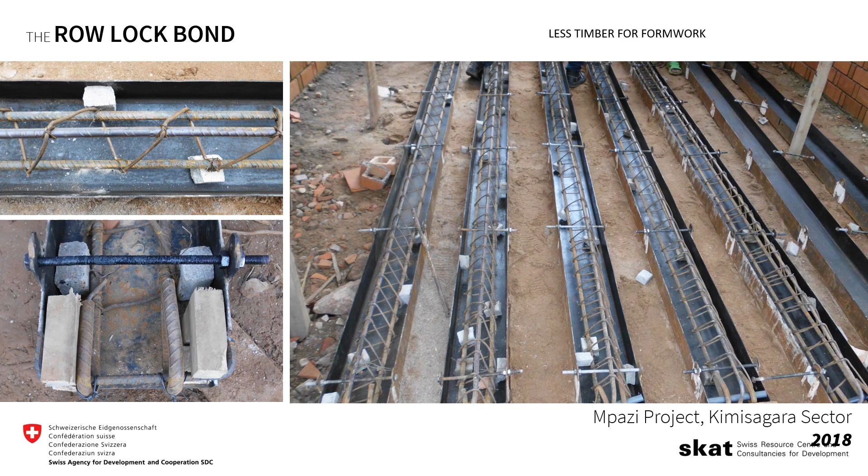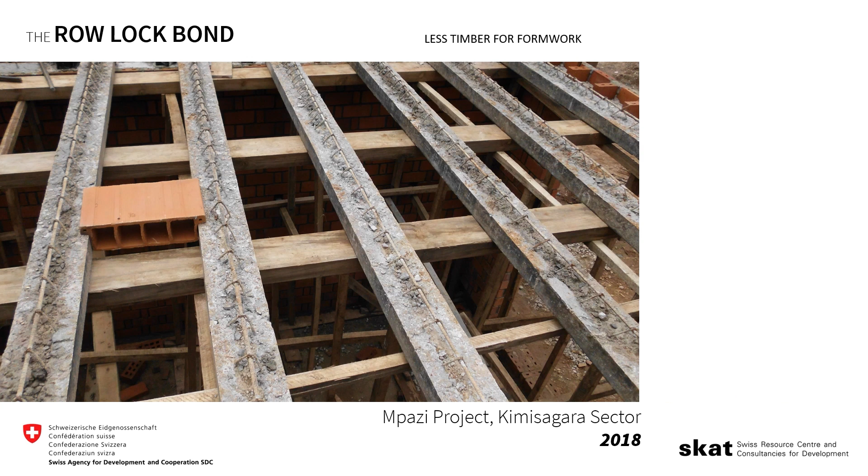I'm almost done, don't worry. The other big difference is that they poured all their max pans in situ, and the cost of timber was a significant amount of their budget—over 20% of their budget was just buying the timber to hold up the floor during the pour. Some of that can be recycled and used for the hidden roof structure, but still, it was a large amount of money.

So again, all of those choices about how you make things, as well as what you make, really have an impact on what we're doing.